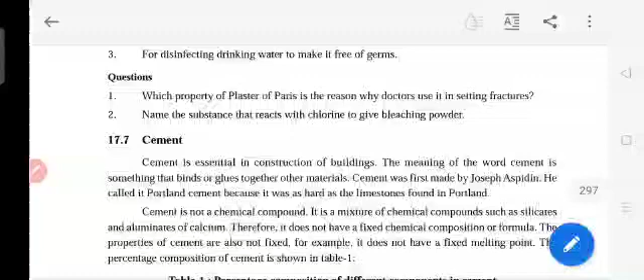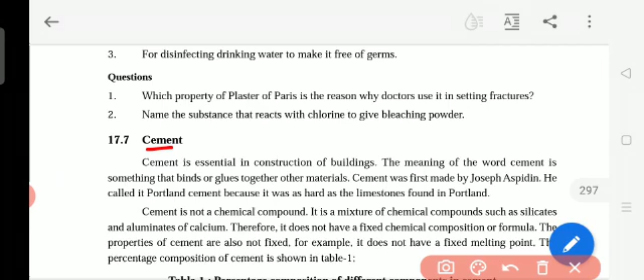Okay, so here we will see the history. Cement is essential in construction of buildings. Essential means very important thing to construct the buildings. The meaning of the word cement is something that binds or glues together other materials. Glues means like gum na, binds. So in between the bricks they keep the cement to paste the two bricks. So like that they use it.

So cement was first made by whom? Joseph Aspidin. He called it Portland cement. After preparing that cement first time, he called it Portland cement because it was as hard as the limestone found in Portland. So to prepare the cement, we need the limestone. The cement is very hard, like the limestone found in the Portland. The Portland is one place. There we find more limestones. So like that it is called, he gave the first name like Portland cement.

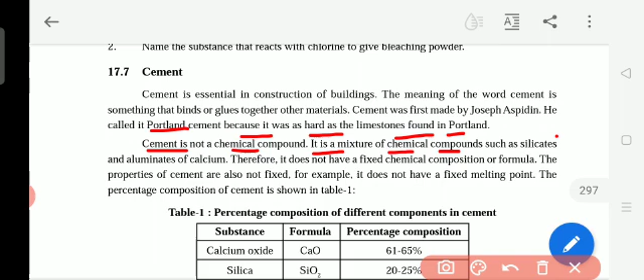Cement is not a chemical compound. It is a mixture of chemical compounds such as silicates. Cement itself is not a compound, but it is a mixture of so many compounds like silicon, means sand, SAND. The sand chemical name is the silicate or silicon, and aluminates of calcium. Therefore, it does not have fixed chemical composition or formula.

Since cement is a mixture of so many things - silicate and aluminate of calcium - therefore it does not have fixed formula. So the properties of cement are also not fixed. For example, it does not have a fixed melting point. Other things has the melting point and boiling point, but cement does not have a fixed melting point.

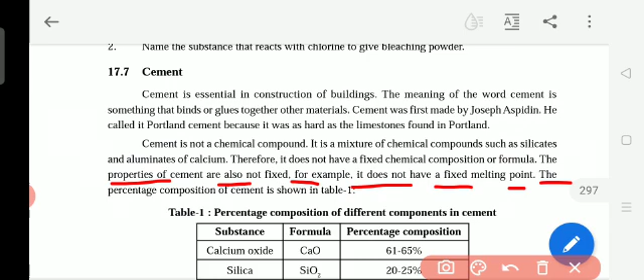The percentage composition of cement is shown in the table. So how much percentage should be taken? In the cement, what are the things present? Calcium oxide formula is CaO, present 61 to 65% of composition mixture. Silica, SiO2, it is present 20 to 25%. Alumina, Al2O3, it is present 5 to 10%. Magnesia, MgO, 2 to 3%. Iron oxide, 1 to 2%. So this much it is present in the cement.

So now we will study how to make the cement. Okay, so the raw materials - cement manufacture means preparing. The raw materials needed in manufacture of cement are limestone. So what are the raw materials needed to prepare the cement? The first one is limestone, CaCO3, calcium carbonate. Ca means calcium, CO3 means carbonate. Calcium carbonate means limestone. Clay and gypsum.

Clay contains large quantities of oxides of iron, aluminium and silicon. Now we see what are the things needed. Clay means mitti, soil like, and gypsum. Gypsum means Plaster of Paris - sorry, not Plaster of Paris. Plaster of Paris is also prepared from the gypsum only. Gypsum means to build the buildings we get small black color stones to keep on the roof, concrete. Those stones are called gypsum. For example, to prepare tar roads also they use small black color stones, those stones are called gypsum.

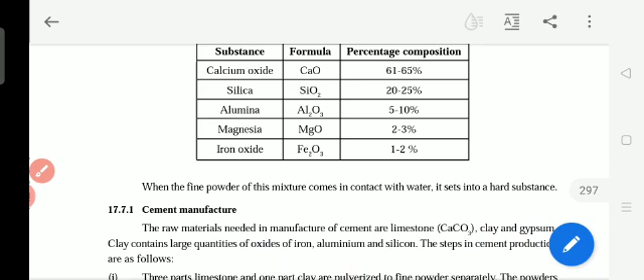So these are the things we use to prepare the cement. What are the things we need? Limestone, clay and gypsum. And clay has the oxides of iron, aluminum and silicon. So how to prepare the cement? Some steps are there: 3 parts of limestone and 1 part of clay. 3 parts means, for example, in 100%, 75% of the limestone and 25% of the clay. 1 part of clay are pulverized.

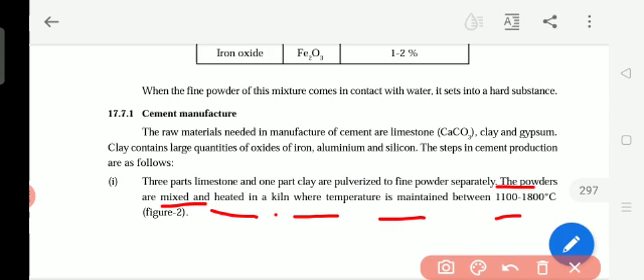Pulverized means making into small pieces - this limestone is like big stones na. So this limestone and clay together we have to pulverize, making into small pieces. After making the small pieces, we have to make it as a fine powder. Fine powder means very soft powder. So the powders are mixed and heated in a kiln, where temperature is maintained between 1100 degrees Celsius to 1800 degrees Celsius. So calcium carbonate and clay, everything we have to make into fine powder, and then it should be heated in the kiln.

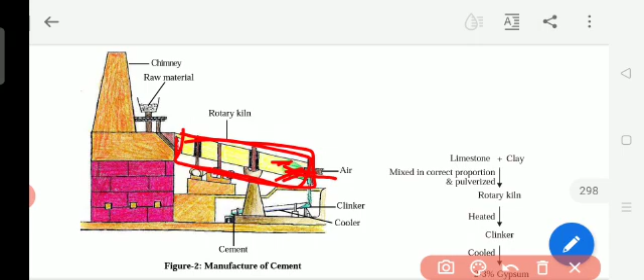This furnace is like the blast furnace we studied in the metallurgy lesson for separating iron metal. Blast furnace means a closed one, but inside we send heat. In a kiln, it's closed, but hot air and heat are sent through it like this, so inside it gets heated.

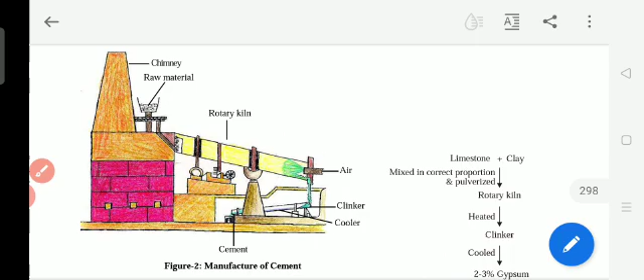Which one is heated? Calcium carbonate and clay are heated inside this. The second thing is that limestone undergoes thermal decomposition. Thermal means heat, decomposition means breaking - one reactant breaking into two or more products is called a decomposition reaction. Because of the heat, limestone breaks down into calcium oxide and carbon dioxide.

So now this calcium oxide will be reacting with the clay, with the oxides of clay. In the clay, oxides are present like silicate, silicon oxide, alumina oxide and iron oxide. These three things are present in the clay.

This calcium oxide reacts with the silicate oxide first. When it reacts, it forms compounds - di means 2, tri means 3, tetra means 4. So we get dicalcium silicate with formula 2CaO SiO2. At this temperature, when calcium oxide reacts further, the calcium oxide ratio increases to 3, and here we get tricalcium silicate.

Again here with 3 and aluminum oxide, at this temperature it forms tricalcium aluminate. This also forms tetracalcium alumina ferrite.

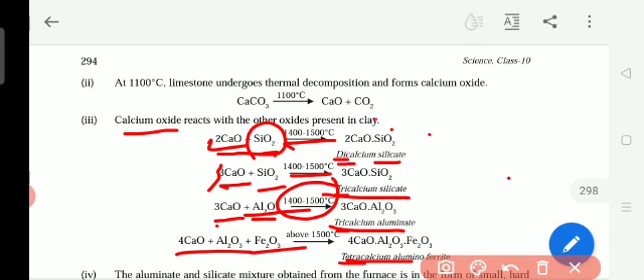At this time you should know so many formulas because you are studying in class 10th. You shouldn't say you can't understand the equations and formulas. You should learn by heart all these formulas actually, otherwise when you take chemistry in 11th, you will suffer.

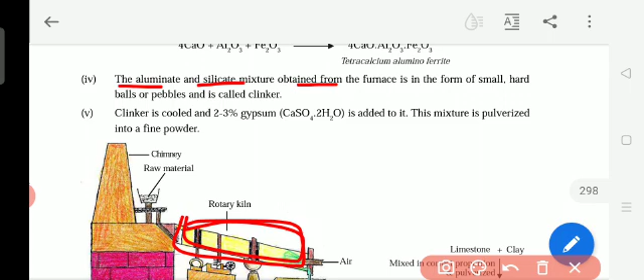So the aluminate and silicate mixtures, after all the reactions take place in this furnace - obtained from the furnace, a rotary kiln meaning it rotates - the product is in the form of small hard balls or pebbles, and this is called clinker.

After calcium carbonate (limestone) undergoes thermal decomposition, it breaks into carbon dioxide and calcium oxide. Carbon dioxide is sent outside, but calcium oxide reacts with the clay.

In the clay, so many things are present - what are they? Iron oxide, silicate oxide and aluminum oxide, everything reacts, and at the end it forms tetracalcium alumina ferrite. So the end product we get is what?

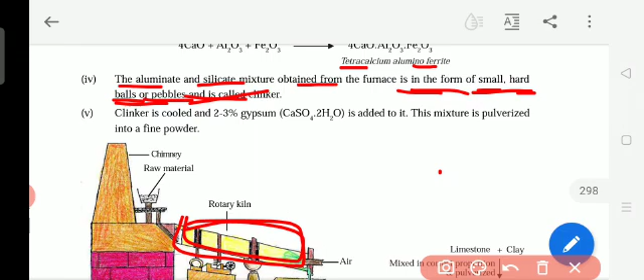As small hard balls or pebbles - pebbles meaning like small stones, we get this product. It is called clinker. So afterwards, what happens to this clinker?

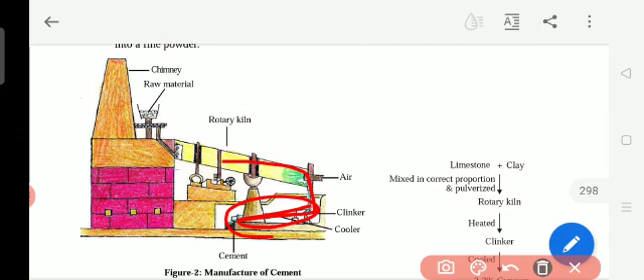This clinker will be cooled here - this is the clinker. The product goes to the clinker stage, where it is cooled and they add gypsum here. What do they add? Gypsum, about 2 to 3%, and we get calcium sulfate with water added to it.

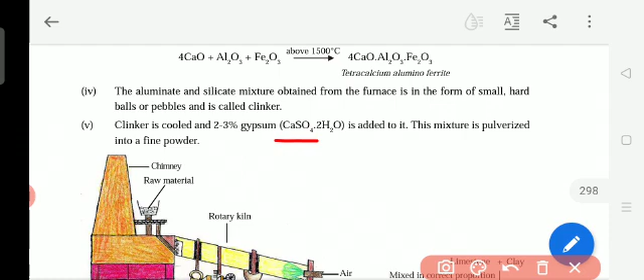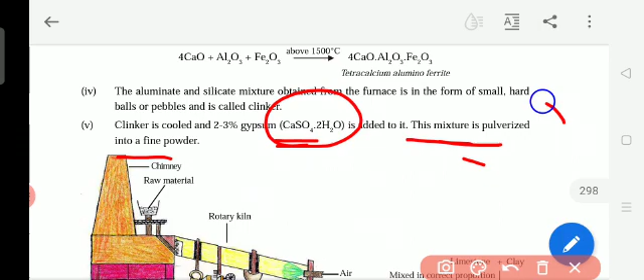So the gypsum formula is this one. After it's added, this mixture is pulverized - pulverized means making it into a fine powder, first breaking into small pieces and then making into powder.

So this is the process. Then the raw material - here they are mixing the clay and calcium carbonate (limestone). After mixing, it is poured into the kiln.

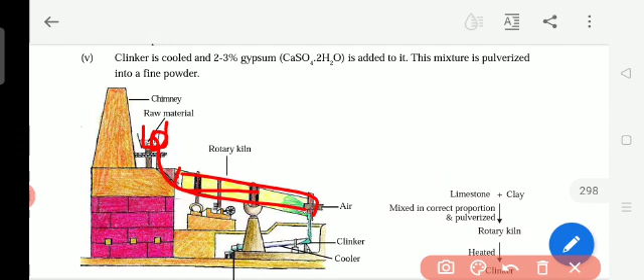Here calcium carbonate, because of the heat, forms calcium oxide and carbon dioxide is released. Calcium oxide reacts with the clay, which contains silicate, aluminate and iron oxide, and afterwards we get the product, which goes to the clinker stage.

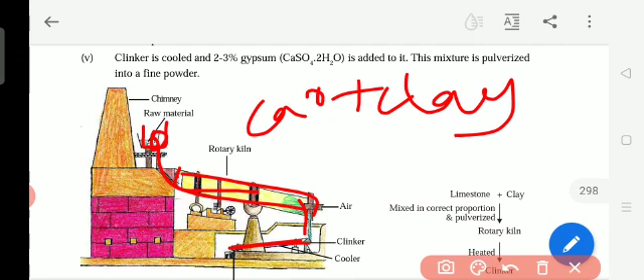In this clinker stage, after the reaction, the product we get is hard pebbles like hard stones - that is called clinker. That clinker is cooled here by adding gypsum.

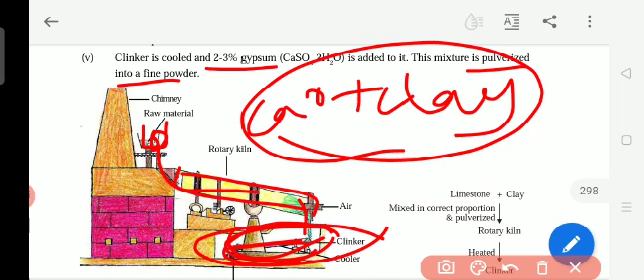Afterwards, after cooling, it is again made into small pieces and a fine powder. So this one is the cement. Here you see: limestone plus clay mixed in correct proportion, pulverized, making into small pieces and powder, kept in the rotary kiln and heated, becoming a clinker like hard pebbles.

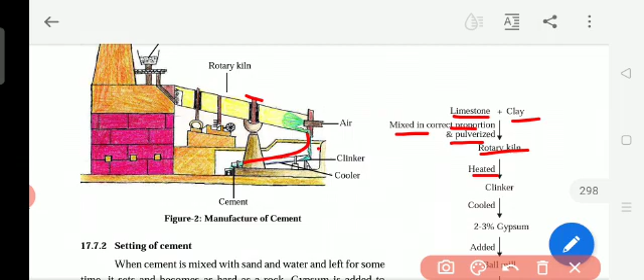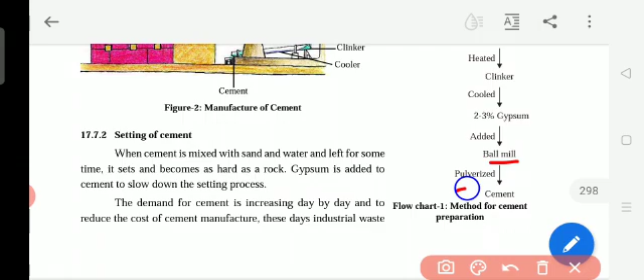It becomes like hard stones, and then gypsum is added. After adding gypsum, it goes to the ball mill where it is made into small pieces, pulverized, and we get the cement. So this is the preparation of cement.

So here, what does the chimney mean? All the waste gases are sent outside through the chimney.